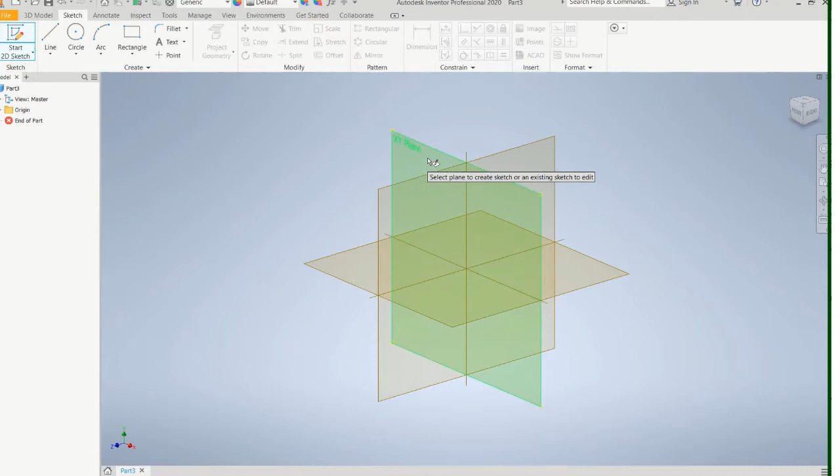I'll go to my Sketch tab, start a 2D sketch, choose a plane. Remember, you can choose any plane, it doesn't matter. Then I'm going to use the line tool to make the sketch, and again, don't worry about the dimensions, just try to get the general shape of the object.

And I'm going to try my best to get the lines horizontal and vertical. If not, I'll just come back and adjust those as needed.

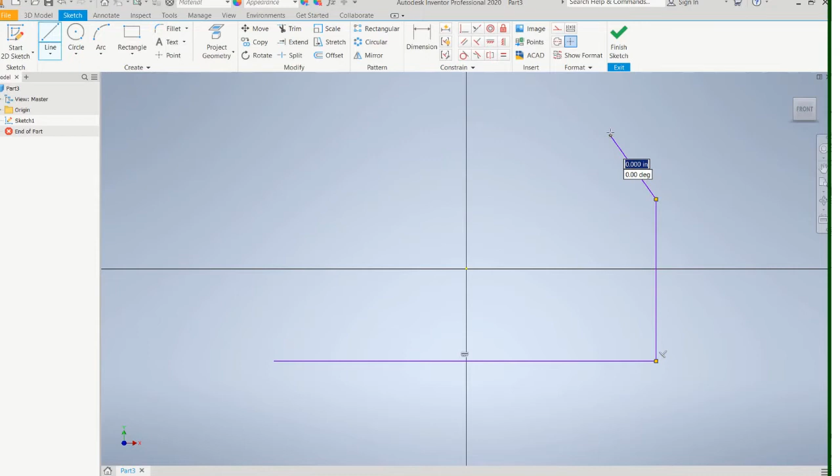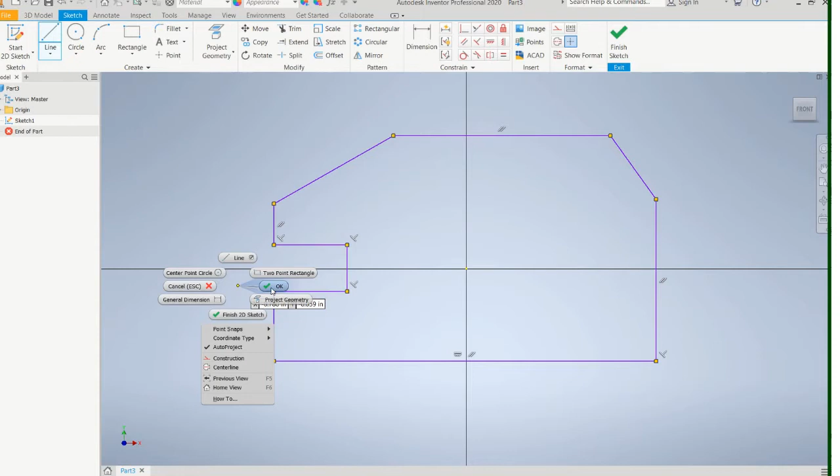Now it really doesn't matter where you are relative to the origin. Right click and say OK, but we will put some dimensions on there to fully constrain it, because again the lines are all purple, which means it's not fully constrained.

So next I'm going to add the dimensions, and because I just sketched the shape, I don't have any actual sizes on there yet. Just hitting Enter after I put each dimension in.

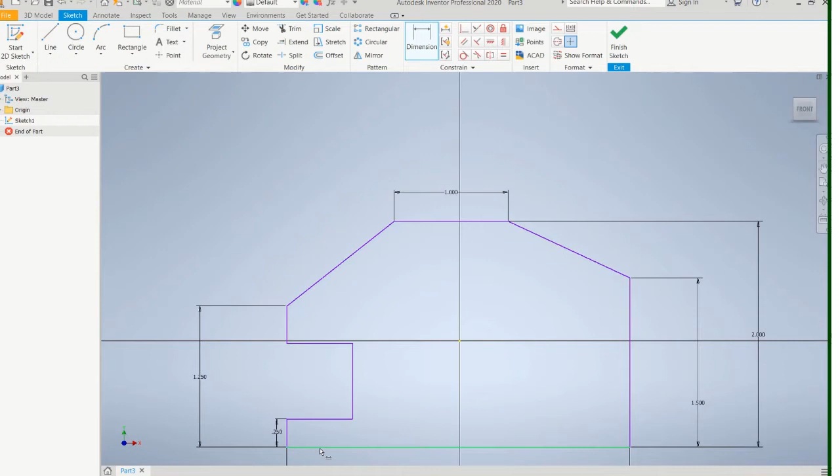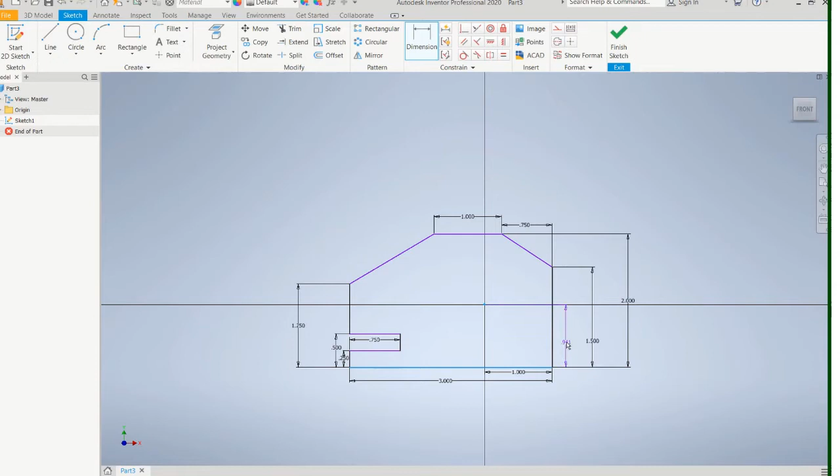So I've got the dimensions all on there, but everything's purple because it's not fully constrained yet. I will add some dimensions to locate it relative to the origin. Now everything's black because it's fully constrained.

This object does have a hole in it as well. It's a hole that's 1 inch in diameter. Everything's black, so I'll finish the sketch.

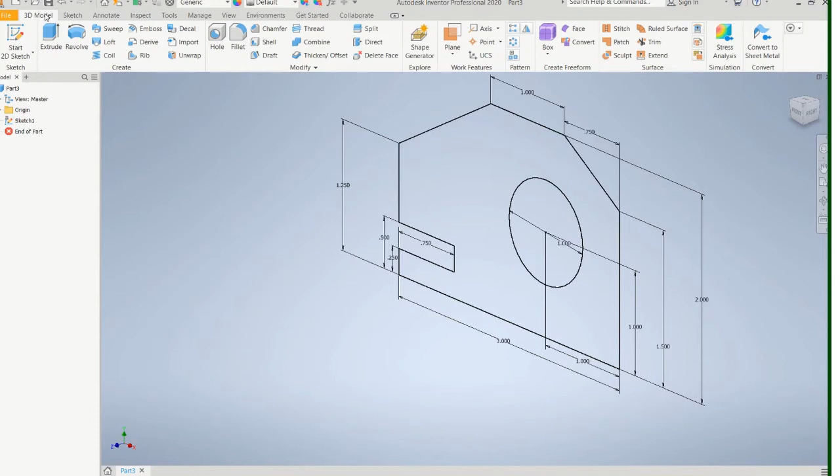Then I'm going to go to my 3D Model tab, click on Extrude, and then choose the area that you want to extrude. So this is the area that's in color now, is the one, I could choose that. That's the only other area.

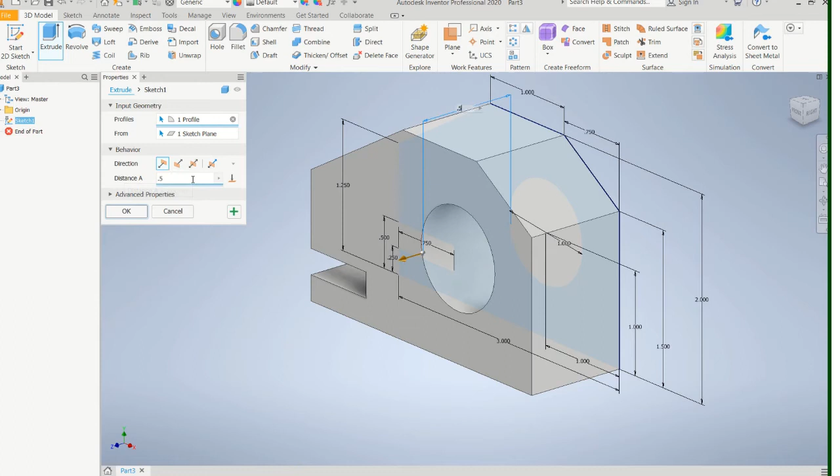And the software is just going to a default value of 1 inch. This part's actually going to make it 1/2 inch thick. See, it doesn't matter, you can go toward you or away from you, it doesn't really matter. Say OK. So there's my model.

If you hold down the Shift key and your middle mouse button, you can rotate it around and see what the model looks like.

Now I'm going to do a Save As. And this is page 145, exercise 1. Save it. Now I'm going to put it on the drawing sheet.

So I'll go File, New, and I'm going to choose Drawing. It's an ANSI inch drawing, and say Create. And the drawing sheet's going to pop up.

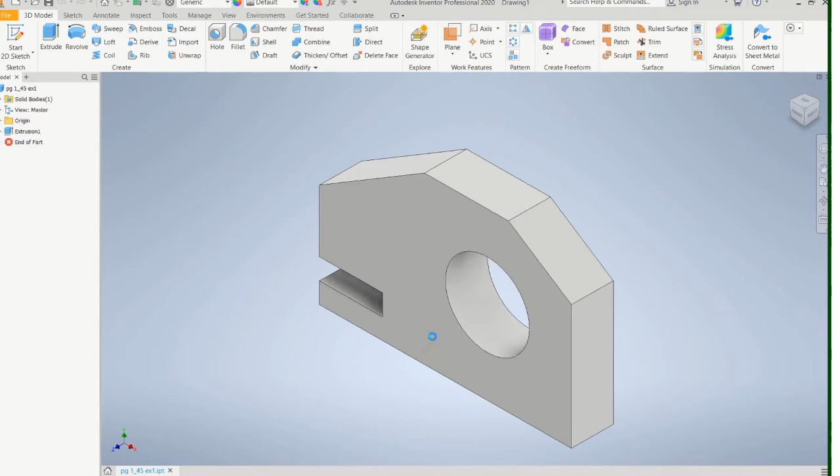Unfortunately, the default is a D size. A D size is a 24 by 36 inch piece of paper. It's way too big for this part that is 3 inches long. So what we're going to do each time is we're going to set the sheet size.

If you go to Drawing Resources, Sheet Formats, and if you double click on B and say OK, see it'll put on a B size paper. So B is 11 by 17.

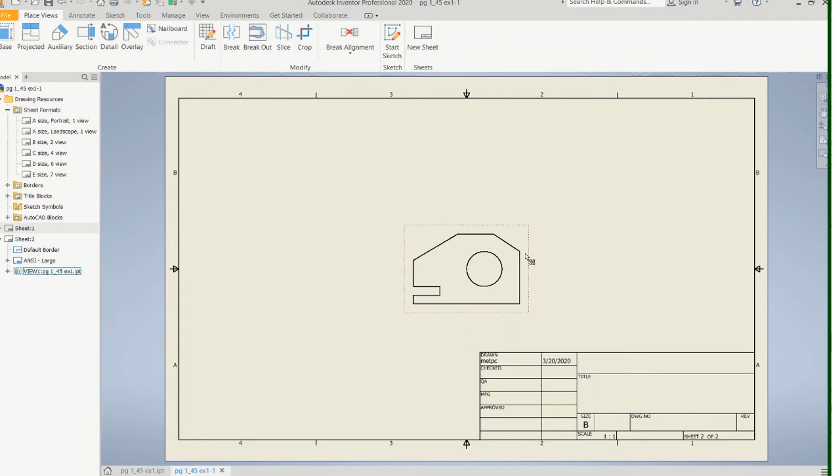It's much more appropriate. The software will try to figure out what it thinks is the best view. I'm just going to delete that. So go up here to Base and say OK, and it's going to put a view on the page again. Now that's just what the software thinks is the right one.

Let's edit that view. So you'll notice what you can do is, see that red box that pops up, if you put your cursor inside there and right click, these different menus will pop up. I'm going to click on Edit View, and several things are going to show up.

Primarily I want to look at this cube, and if you click on, now even though that says front view, that's not really the front view I'm looking for.

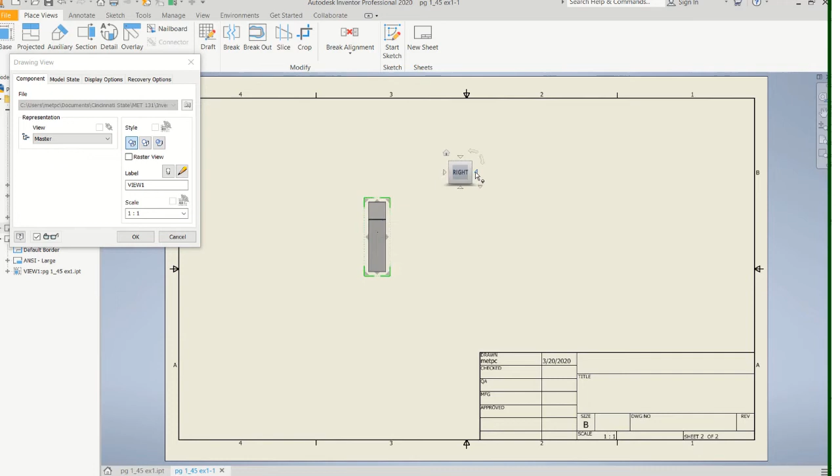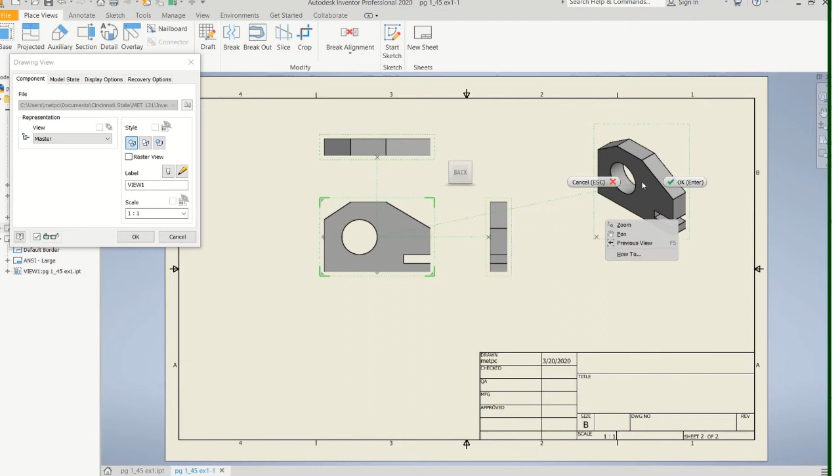If you click on this arrow, it'll spin the model around until you get what you want. Now I'm going to choose that one because it gives you a much better right side view. Once you've established that, just move your cursor over, click, that'll be the right side view, cursor up, click, that'll be the top view. And since we have a 3D model, let's put it over here in the upper right hand corner. So you're going to click, right click and say OK, and that'll complete your drawing views.

And you'll notice it already has the hidden lines on there. We'll have to go in and add dimensions, and we'll do that under Annotate, Dimension Tool. Now the dimensions here are going to show up because obviously we're going to print this out. So you want to use good dimensioning practices. The dimensions on the sketch, we don't really care about that so much because that's just for construction techniques.

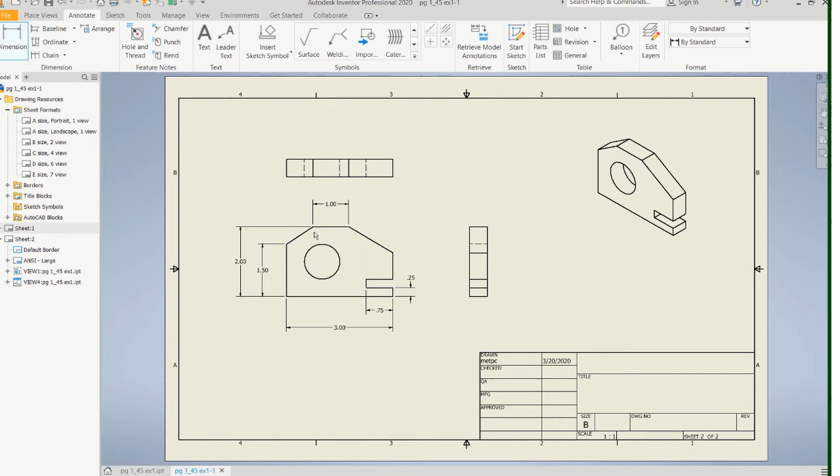And again, follow the basic rules. For example, don't crisscross dimensions, don't dimension to hidden lines, those kinds of things. Still have the same concerns with good dimensioning practices. In this case, when you have dimensions like this, try to line them up. And let's see, what else do we have? This one here. I know I'm putting almost all the dimensions on this front view. Let's dimension the thickness here.

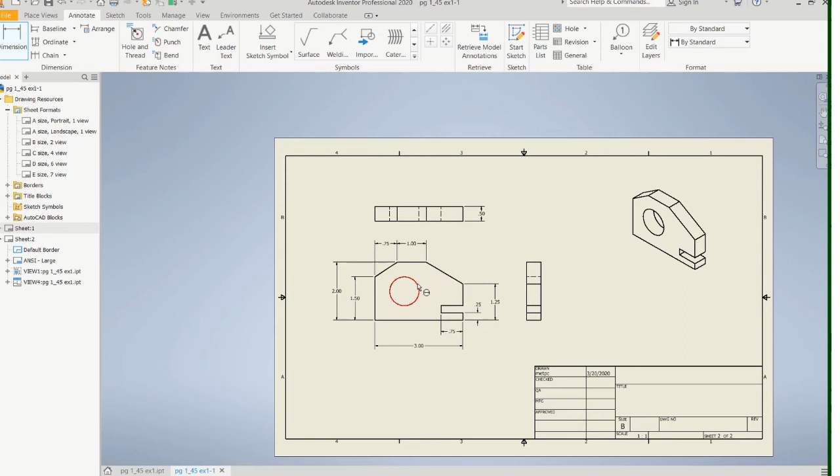I need the dimension on the circle. So this dimension tool is pretty clever. If you click on a circle, it knows that it's looking for a diameter. You just have to pull it out and locate it. Now we still need to locate where the hole is. And if you go to the outside of the circle and come back in, it'll find the center for you. And if you want to move your dimensions, just click on them and drag them so you can put them in a better spot.

Now notice there's no center mark there. The center mark tool is up here. So with dimensioning, we're in this Annotate tab. Right over here is the center mark tool. If you just click on the circle, it'll put the center marks on. Now notice we're missing the center lines. So if you use this tool up here,

what you're going to want to do is click on the two edges. Like that's one edge of the hole, and that's another edge. It'll put the center line on there. That's the top of the hole, and that's actually the bottom. It lines up with that edge there, and that'll put the center lines on there. And then lastly, I think I have everything.

Lastly, we'll want to put our name. Just use text. Come in here in the title and draw a text box. So it's kind of like PowerPoint or Word. It creates a text box. And we'll do the same things we've been doing before. Put your name, the course number, and then page number, problem number. 45, exercise 1. Say OK.

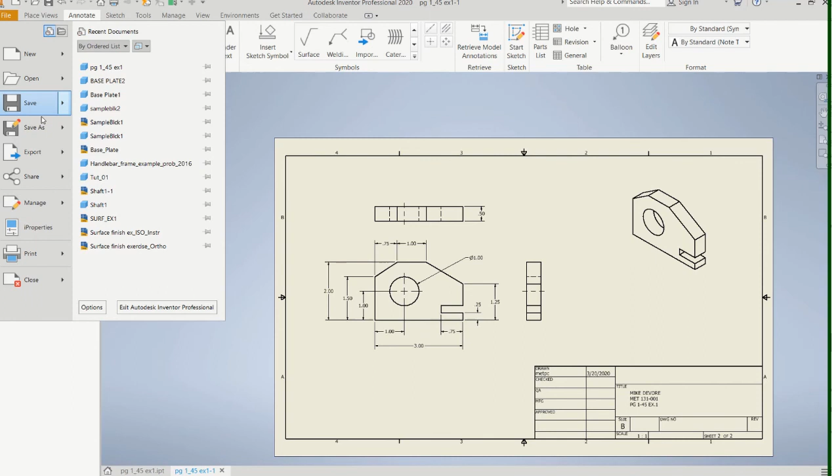And then we'll just save that. So I'm going to do a save as. Oops, I already saved it once, so I can just do a save. The other thing that we can do is export this as a PDF, and that's the way I'm going to collect your assignments, through a PDF. So instead of doing save, do export PDF. You can use the same name, put it in the same folder. It'll save it as a PDF file. And then you can email that to me as an attachment, and that's what I'm going to grade.